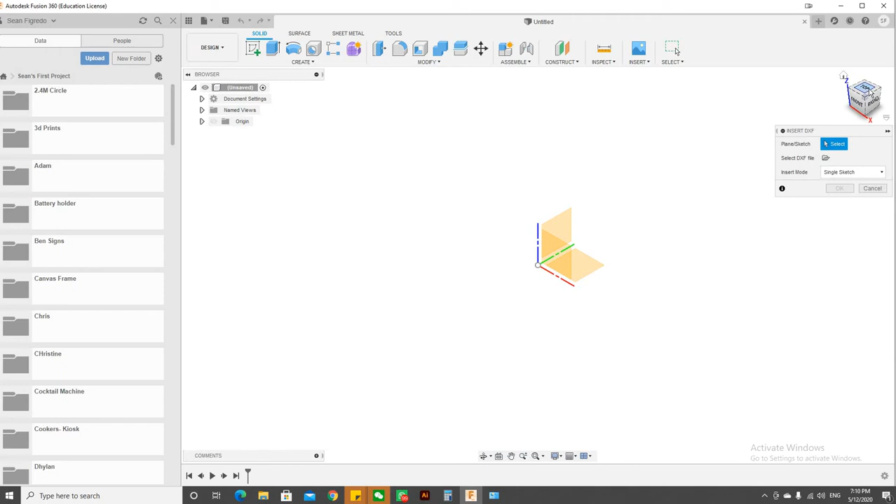So what you want to do is under your home, go under insert, go insert DXF. Now if you'll see this box here, you can imagine your machine over here, right? So this is your Z-axis, this is your X, and this is your Y. Okay, so this is basically how you're seeing the machine, and this is going to be the machine's bed, which is your Y-axis, and this is your X-axis.

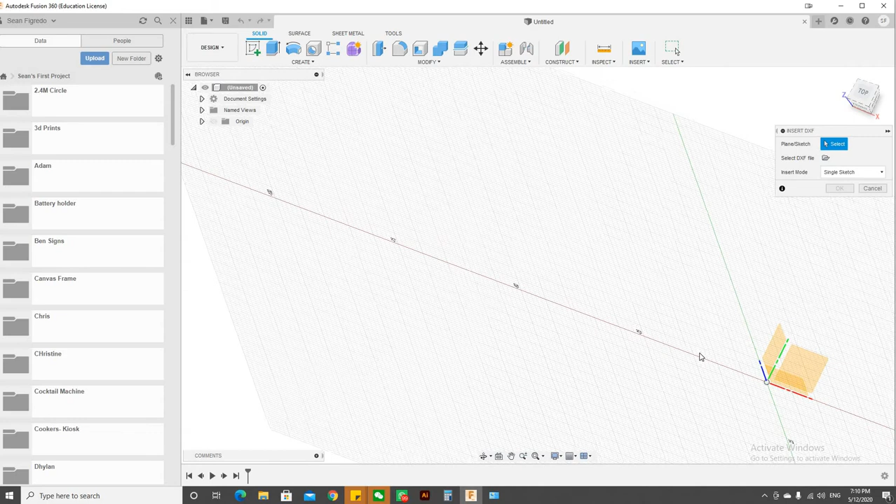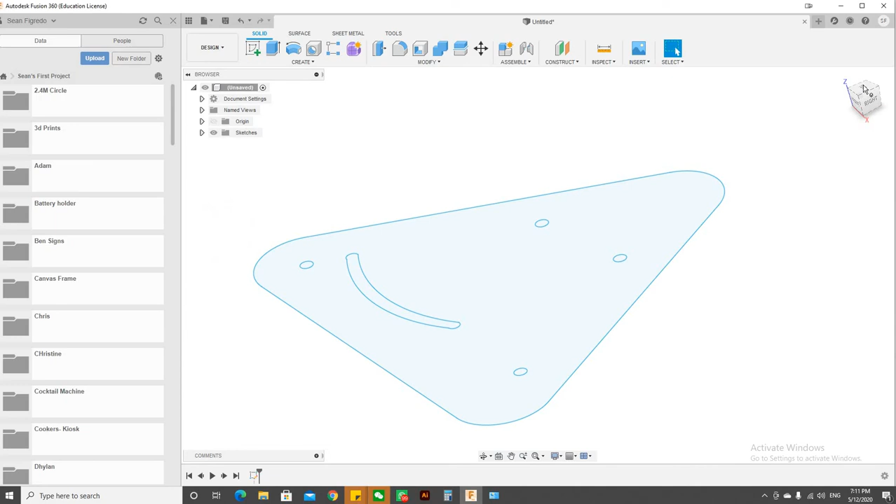Alright, so I'm going to select the bed of the machine, and then I'm going to select the DXF file, open. Once it inputs it, make sure it's in your right units, and then click OK. So that's pretty much it, how to import your DXF file.

Now for this part, we're going to cut it out of 19 mm wood. So shortcut on your keyboard to extrude it is E, and you can select the part, give it 19 mil, and you can extrude it.

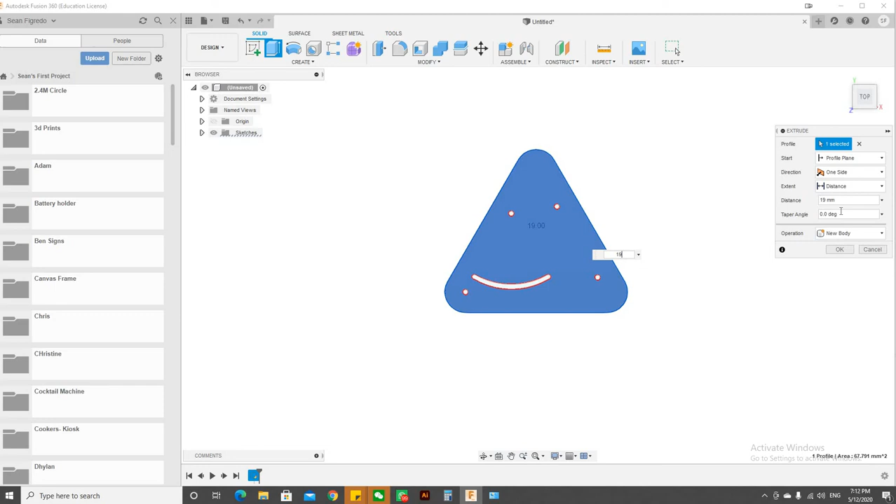Okay, now what I'm going to do is, let me just show that to you where you can have the extrude function. So your extrude function can be up here as well, so that's extrude, so you can click on extrude, go here, and this is going to be 19 mil.

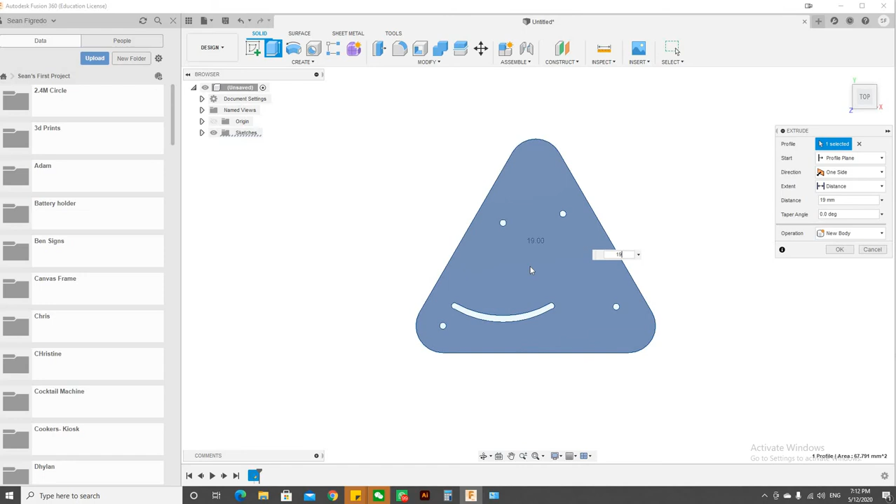Now what I'm going to do is, this smile over here, or this sort of looking smile, is going to have a 4 mm depth. Sorry, not going to be 4, it's going to be 10.

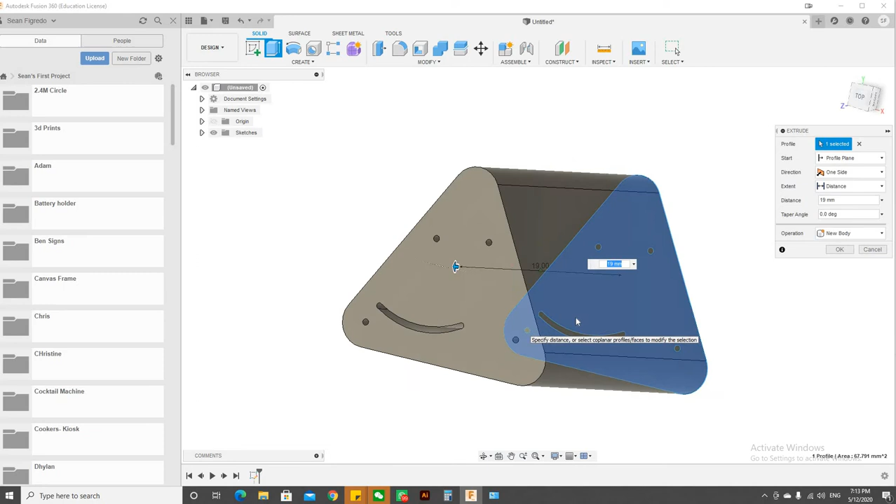Okay, now because it's going to have like a groove or 10 mm groove, I don't want it to be all the way through, I just want it to have a groove. So you can see this is your base point right here, so it's going to go right up, but actually we're going to have just a 10 mm groove.

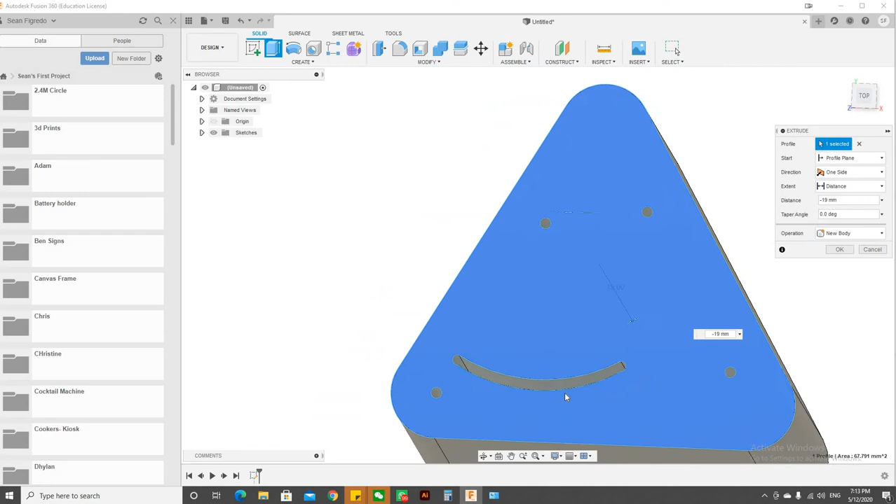To make it more easier, I'll put this as 19 minus 19, so it goes down the other way. And what I'm going to do is I'm going to select this part as well. Oh, sorry, let me just grab that, there we go. So you can see that it's going to go all the way through.

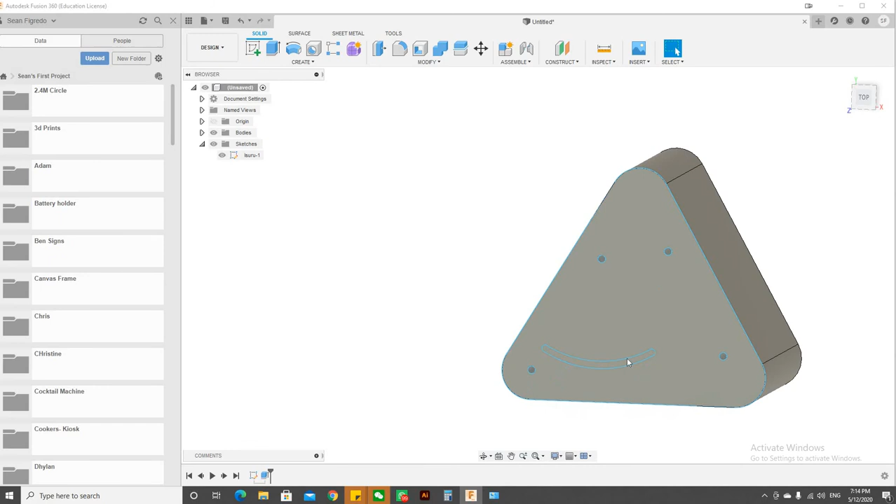Okay, you can see you've got your holes as well going all the way through, and then I'm going to hit OK. Now what I'm going to do is I'm going to turn on the sketch, and then I'm going to click that smile. Shortcut is E to extrude, and this is going to be minus 10. Okay, and then I go OK, and now if you can see, it's minus 10. It's created that groove.

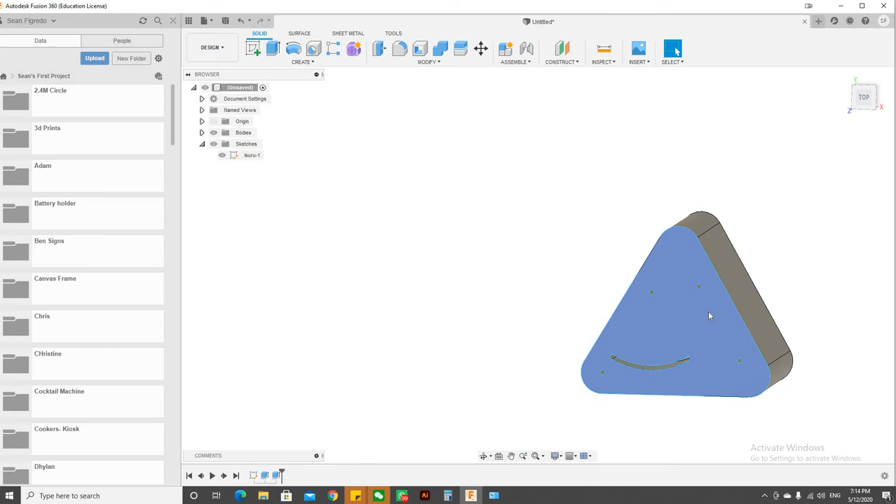Okay, now we are ready to go over to the camming section and try to cam this out. So what I'm going to do is go over to my left, go over to manufacturing, and then I'm going to set up this part, the stock.

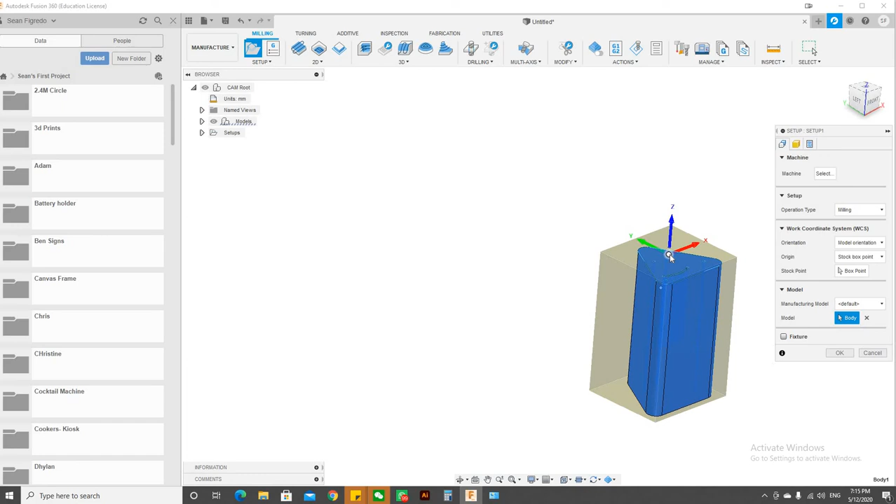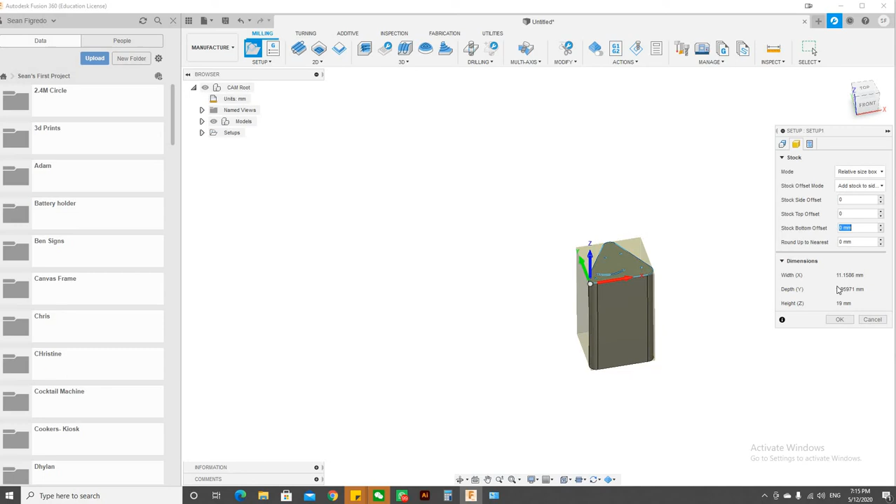So now it's best practice to have that 0, 0 coordinates right at the corner. So click on stock point, and you want this to be the top corner. Okay, so it's always got to be the top left hand corner, so that's your Y, X, and your Z axis. Now our machines are all pretty accurate, so I usually put that off all to 0.

Okay, next what I'm going to do is create some toolpaths. So ideally the way you want to do it is first pockets, second holes, and third you want to do a contour cut, which is cut all the way through. So let's do the pocket first.

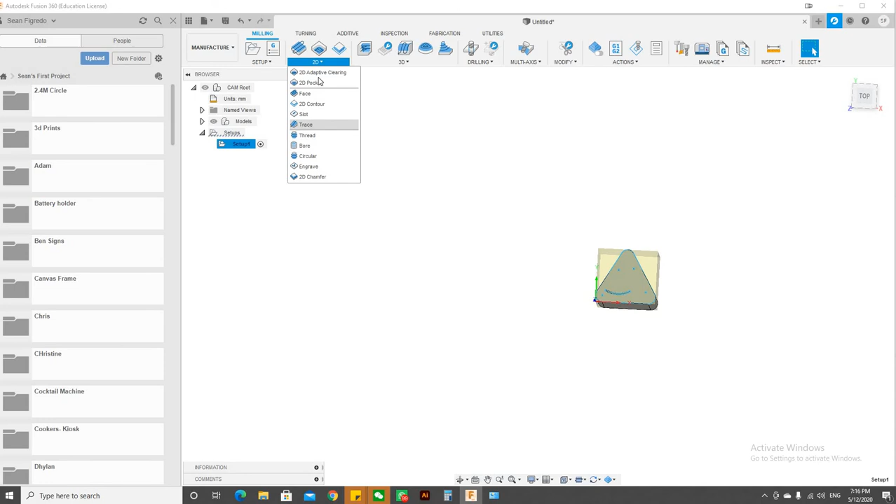So the good thing about Fusion is Fusion shows you all the different functionalities, different parts that you can do, and it explains it. So for this one we're going to do a pocket, which is your 10 mil pocket.

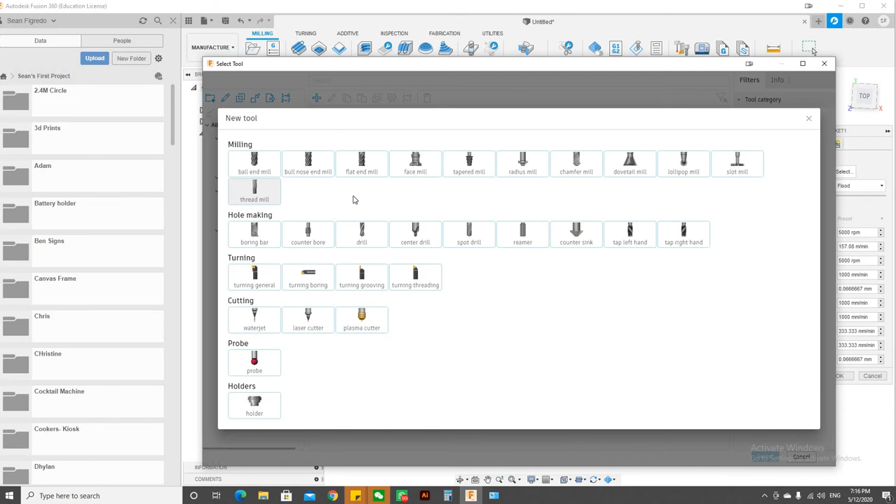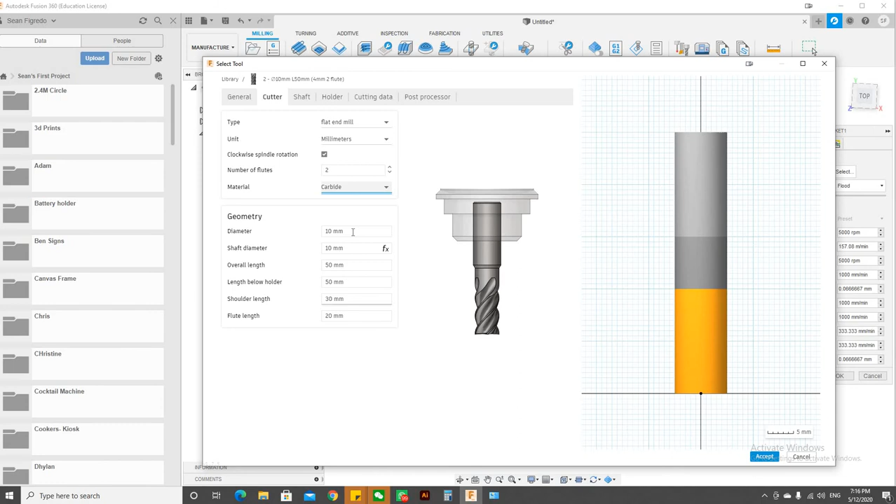So right now I'm going to add a new tool. Let me just add this is going to be a flat end mill. This is going to be a 4 mm 2 flute. And then number of flutes is 2. Material should be carbide. Diameter is 4.

Shaft diameter is 6. Overall length, we're cutting 19, so you might want to have more than 30 mil, but I'm just going to leave it as it is for the sake of it.

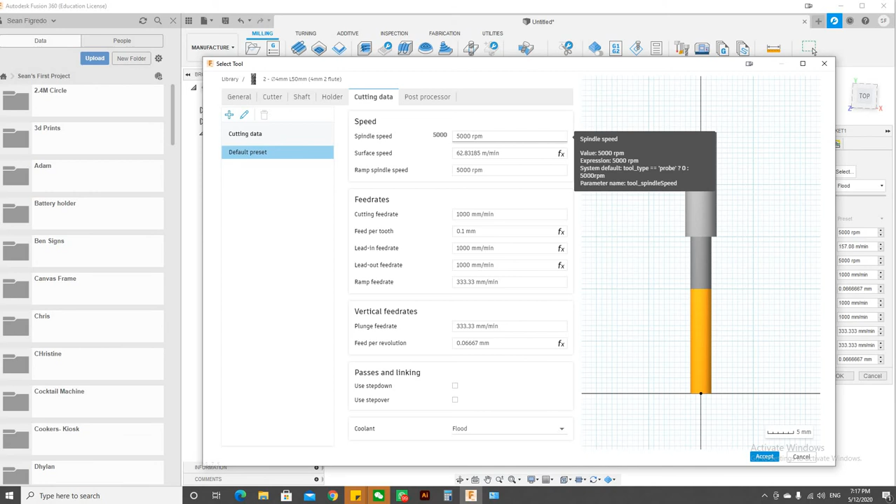Now spindle RPM, you've got to look up the specs on your spindle. Usually for wood it's about 18,000 RPM. Your cutting feed rate for wood, you can go up to 5,000, and if you need to reduce it, you can do so on your controller. Plunge feed rate, yep, that's all good.

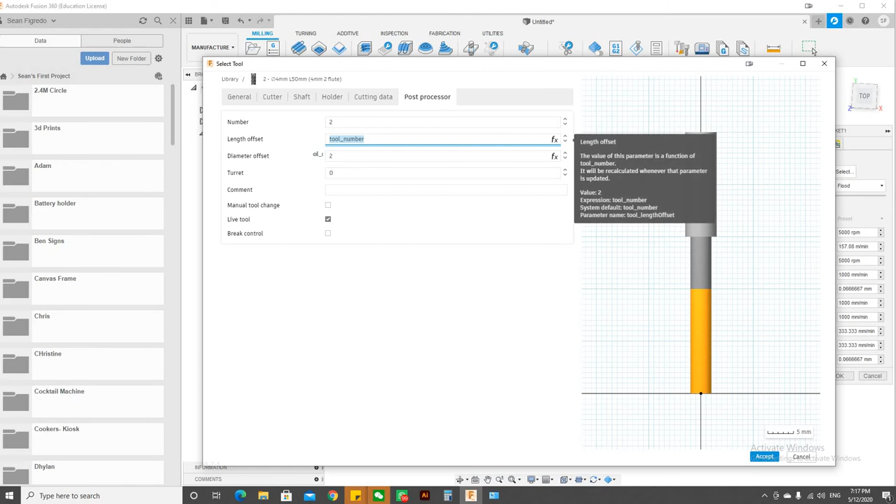Now this part is really important. On your ATC machine, if you have one, you'll want to put down the tool number where it's going to be changing. If you've got this tool placed in your 6th tool holder, then you want to change this to 6, just the top one. If you put 6, you'll notice everything else will change.

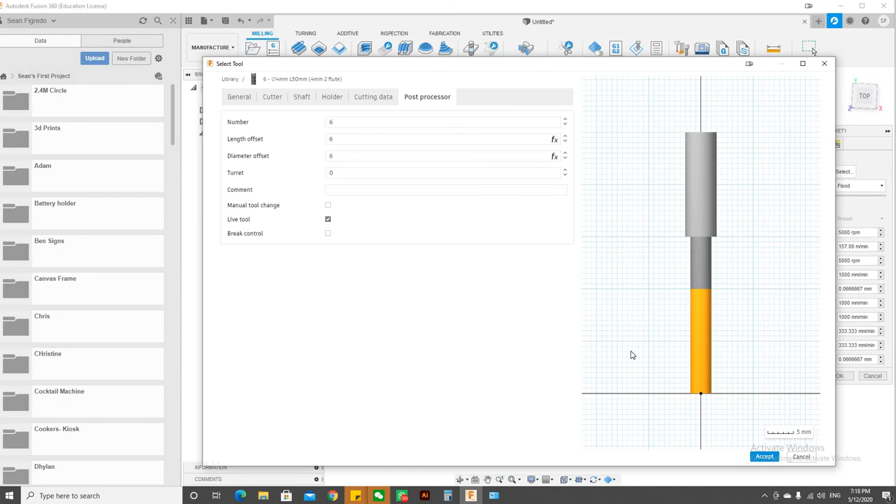And that's it. So now that you've selected your tool, we're going to go into where you select your RPMs, feed rates, whatever. And then now we can select what you want to pocket out. So I can go here, select this right at the bottom.

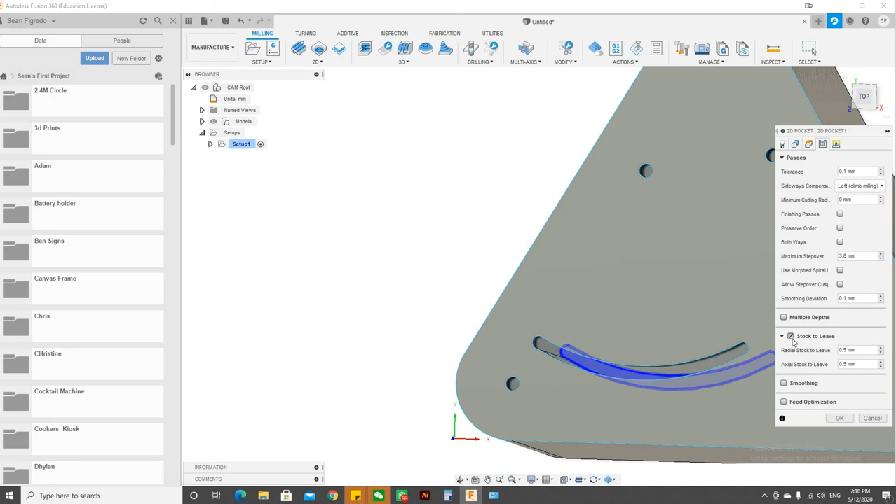Let's select that. Heights geometry is if you want to change your heights and geometry. Generally speaking, you don't have to. This is if you want to do multiple passes, so it's probably good to do multiple passes. You don't want to do it in one straight stretch, so I'll do it in 2.

So I'm cutting that at 10, I'm going to change it to 5. And then I find with this, if you take them off, it just works better. Get a cleaner cut. Hit OK.

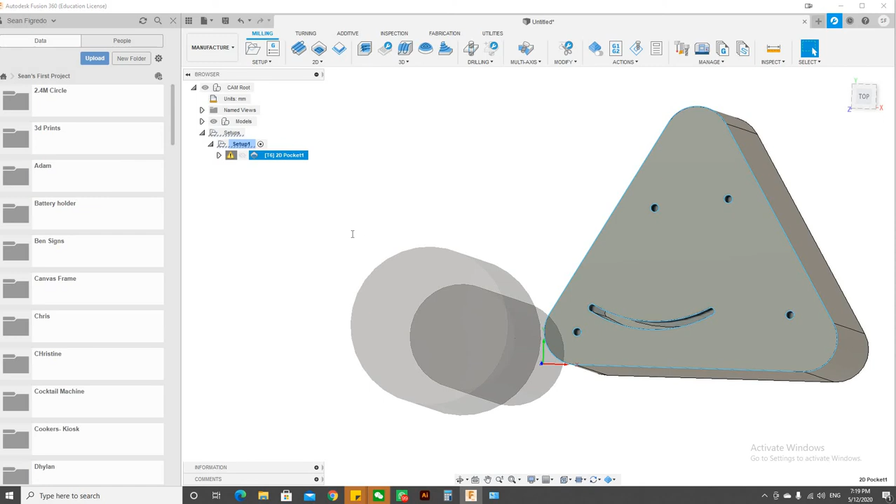That's it. So you'll notice that Fusion will select it, and it should, but let's see, we've got an error. Let's see what this error is. Okay, so just checking the warning, it's to do with our feed height. According to the toolbit, it's deeming it not safe.

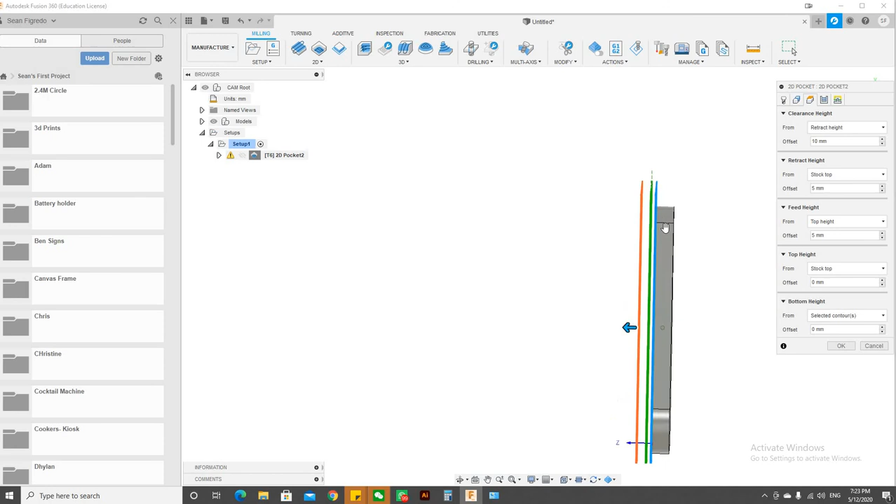So that's this part here, because remember how we've gone below the -19, but that's okay, it'll still work, it'll still do its thing. So that's what that error is.

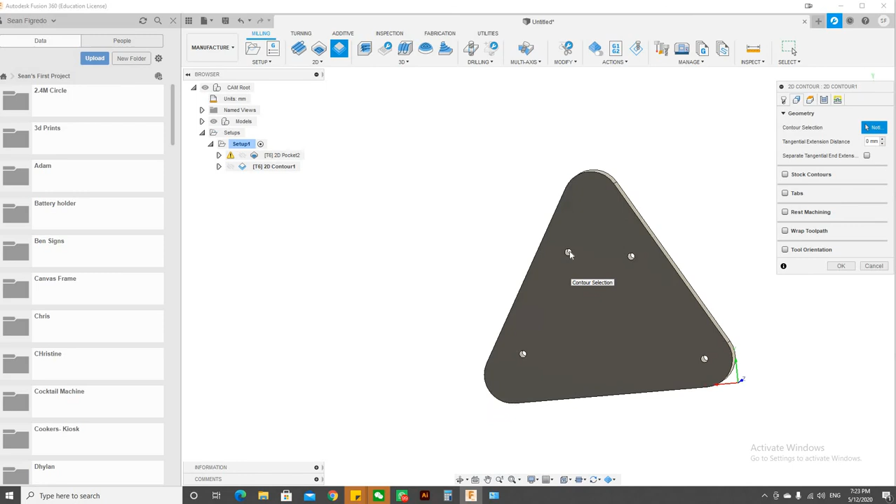Anyway, we can proceed. So the second is now holes, so go into contours, same bit, same speeds, feeds, and now you have to go through the back to tell the machine that you want to cut through the material. See, so you've got to select these holes.

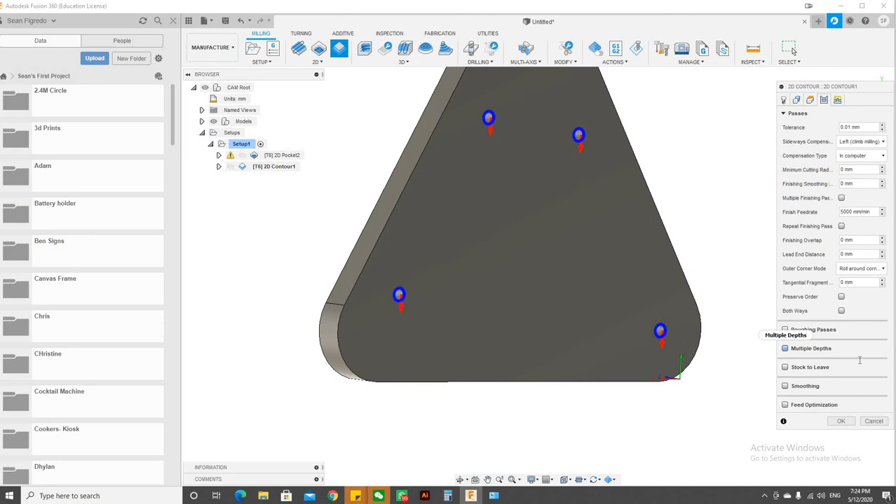And if you click on the arrow, it'll cut it on the outside, but we want it to cut on the inside. Cut on the inside. Now, since this is just a hole, we could do it in just one pass, 4 mil. But if you want to do it in multiple passes, just come down to multiple passes and change it. So I'll put it to 2. And okay, so now your holes are done.

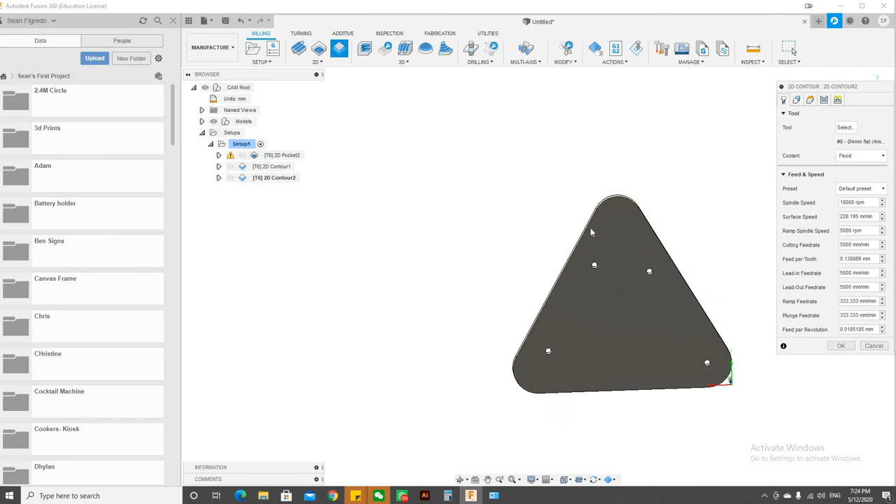Next is going to be again contour, and we're just going to cut out this part. So now again we want to go at the back of the material, click the outer line, make sure it's cutting on the outside, not on the inside.

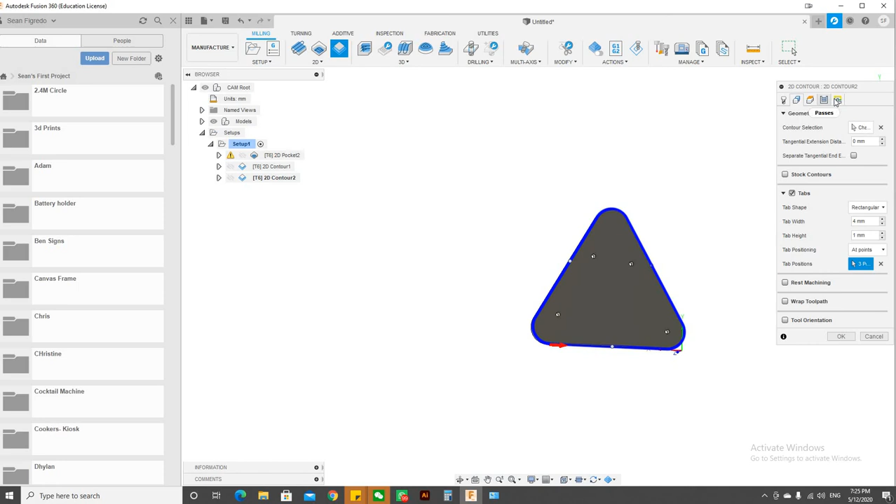Multiple depths, again, I'm going to put it at 5. You see here, if you wanted to add tabs, you can click tabs and browse through this to see which one suits you better. I always like at points, so I can select where I want to tab, and what's my tab width, what's my tab height. I can put that in, and then, as I said, remove these 2, hit OK, and you're done.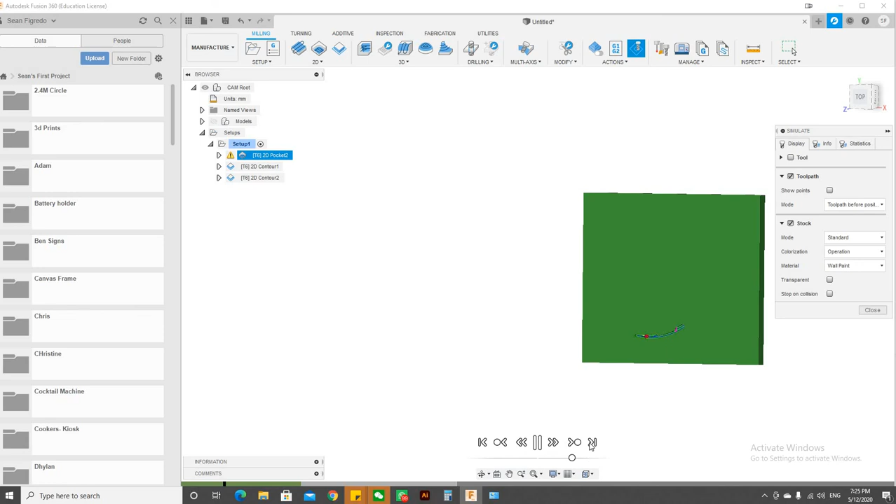So now you could simulate the full thing. You can go to the top right, click simulate, can remove, can hide the model, and click play, and you can see it doing the full thing. So you can see what it's going to look like, the pocket, the holes.

And now for the last bit, all you got to do is click on setup, because we're exporting this full thing. Go into post processor, and then what you want to do is hit post and copy it onto USB, and that's all it is. Hit save, put it into your machine and run it, and that's it.